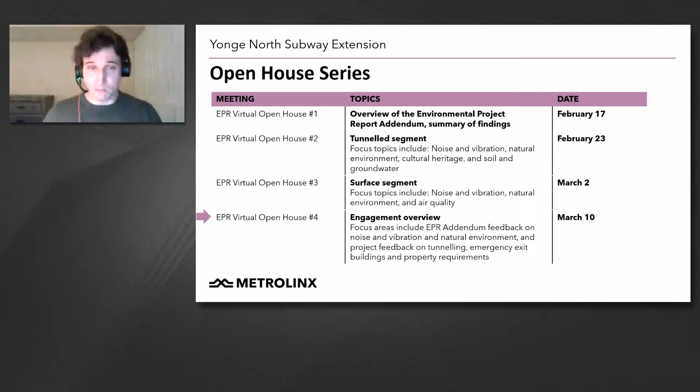All you have to do is click on the Live Events tab on Metrolinx Engage and mouse over the Past Events button. Tonight's open house will be all about revisiting the most popular topics we've been asked about so far and sharing what we've heard from you as we've reached out for input on the study. Remember, you have until next Monday, March 14th, to submit your comments to have them included in the final environmental assessment report.

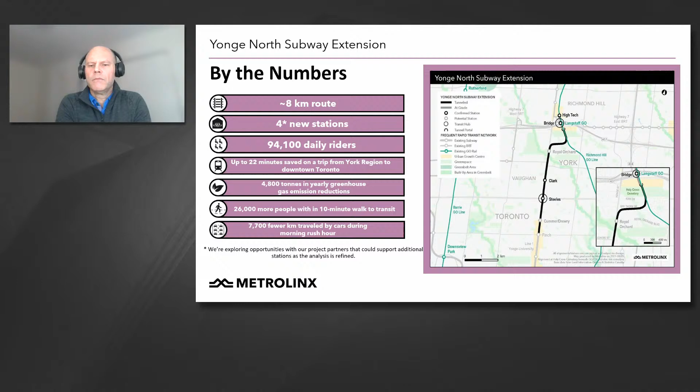First, I wanted to give a quick recap of what the environmental assessment process is and an overview of the environmental assessment process for the Yonge North Subway Extension project. So environmental assessment is a process to identify potential environmental effects of a proposed project. It is completed ahead of construction to identify potential effects on the environment in ways they can be addressed during construction and operation. This work is documented in an environmental project report or environmental project report addendum.

The Yonge North Subway Extension Environmental Project Report was released in 2009, and that report assessed the project alignment that extended from Finch Station to Richmond Hill Centre underground along the Yonge Street corridor. That report was followed by an addendum in 2014, which looked at the train storage facility for the project. And since those two reports, the 2009 and 2014 one, a number of project design changes have been proposed, which are all assessed in our current 2022 addendum report.

At a very high level, these are the surface segment of the project and changes to stations, bus facilities, emergency exit buildings, and the train storage facility. We've covered the changes in more detail as part of the very first open house that we held on February 17th. And of course, you can find a lot more information about this in the addendum report itself, which is available on the website.

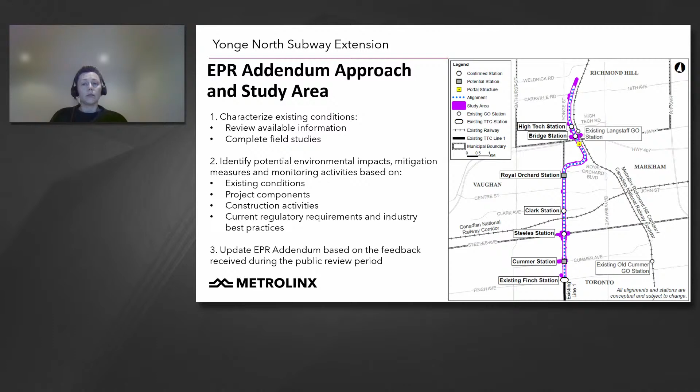The last major step in the addendum development is seeking and responding to your feedback in the forthcoming updates that we will be making to the report. We've notified local communities along the alignment, community groups, municipalities, review agencies, and Indigenous nations of the addendum publication. In the next slide, we will cover how and when the feedback can be submitted and the next step in the addendum process.

So here we go, the addendum review process. The addendum was published on February 10th, and we're nearing the end of the public review period. Public review period closes on March 14th, which is the upcoming Monday, so that would be the last day.

You can submit comments, and then we will take all your comments and feedback and make refinements and updates to the addendum report and publish what we call the updated addendum on April 16th or earlier. Those who were notified of the February 10th publication of the addendum will be notified of the updated addendum publication.

Updated addendum publication kicks off the Ministry of the Environment, Conservation and Parks Minister's review period, which may take up to 35 days. Comments can be submitted to the project email directly, and we also have online feedback forms available on the Metrolinx Engage website.

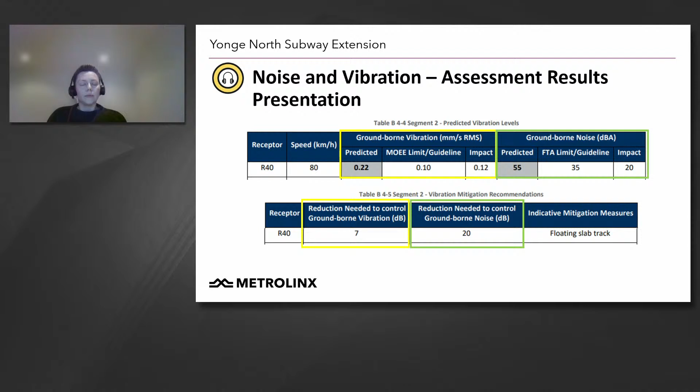Now let's take a look at the vibration levels from tunneling activities. Tunneling activities with most potential for vibration are tunnel boring machines digging the tunnels and temporary service trains transporting excavated soil back to the launch site. Vibration levels generated by the tunnel boring machines are predicted to be below limits for building damage, including heritage structures, some of which are more susceptible to damage than more modern structures. This is because tunnel boring machines slowly auger through the soil and do not need to use vibratory or impact forces to break up the soil.

Tunnel boring machines will be operated continuously and will travel about 10 to 15 meters a day, which means that the tunnel boring machines will pass most single-family residential lots in a matter of a day or two.

Tunnel boring machines will leave soil behind, which will need to be removed from the tunnels. One of the ways this removal can be done is by using temporary service locomotives running along temporary rail tracks, with train cars loaded with materials produced by tunneling. These materials are transported back to the launch site and then off-site for disposal. Temporary locomotives traveling along temporary tracks inside the tunnels have the potential to generate noise and vibration, and we looked at this in our report as part of the construction impact assessment. With the use of mitigation measures such as resilient fasteners for temporary tracks, or rubber-tired vehicles, noise and vibration levels from soil removal activities will be controlled.

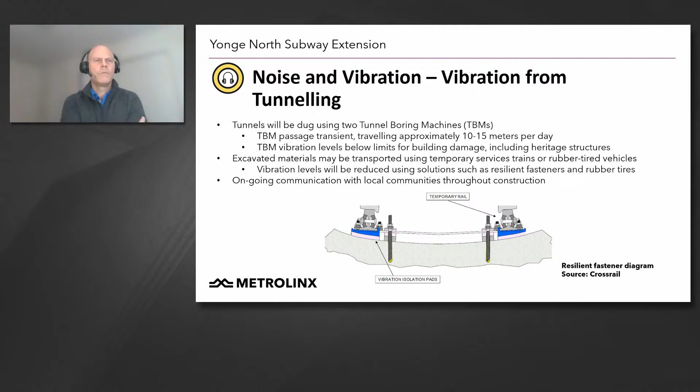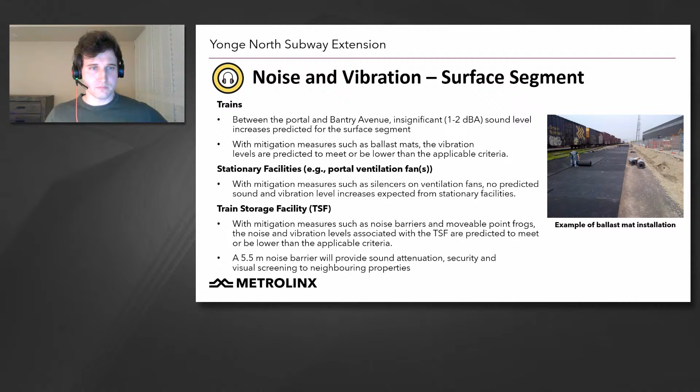I'm just looking at the live feed, Maria. It doesn't seem to be changing. Do you have access to the... Oh, I see it now. It's up? Okay, great. Yeah, there was a bit of a lag.

All right, on to our third topic under noise and vibration, which is surface segment potential noise impacts. I want to start off with train operations along the surface segment. Revenue train operations for the surface segment are between the tunnel portal and High Tech station. Beyond High Tech station, trains slowly travel to the train storage facility, which is also assessed in our report.

Between the tunnel portal and High Tech station, our study predicts a 1 to 2 decibel increase, with one of the assessed locations showing no changes. We covered this in detail at last week's virtual open house, on March 2nd.

I want to stress that the assessment was comprehensive, and this value of 1 to 2 decibels increase reflects all sound sources, including the heavy rail train operations along the existing CN tracks, whereas electric subway trains alone are substantially quieter than those freight trains and quieter than the overall existing sound levels without the subway. This means that subway operations do not significantly alter the sound levels along the corridor.

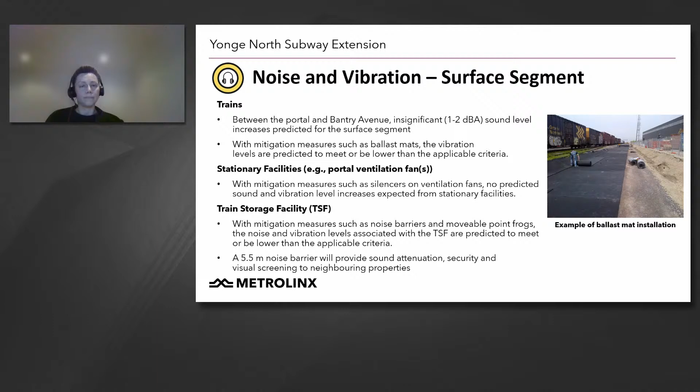That's great, thank you very much, Maria. Good evening everyone. Right now I'd just like to spend a few moments talking about vegetation removals, as Maria introduced.

Right at the outset, I will say that Metrolinx and the project team are committed to protecting as many trees as possible while building the Yonge North Subway extension. Vegetation removals will be reduced to the greatest extent possible, and limited only to the construction footprint.

For any trees that must be removed, we will work with municipalities and groups like the Toronto and Region Conservation Authority to provide compensation in accordance with Metrolinx's vegetation guideline. The vegetation guideline takes a landscape science-based approach to vegetation compensation that meets and exceeds the requirements of applicable local bylaws.

The Metrolinx vegetation guideline also ensures that many more trees are planted than are removed as part of Metrolinx's work. Any vegetated areas that are temporarily disturbed as part of construction will be restored and revegetated to ensure there is no significant disruption or aesthetic issues during the construction period.

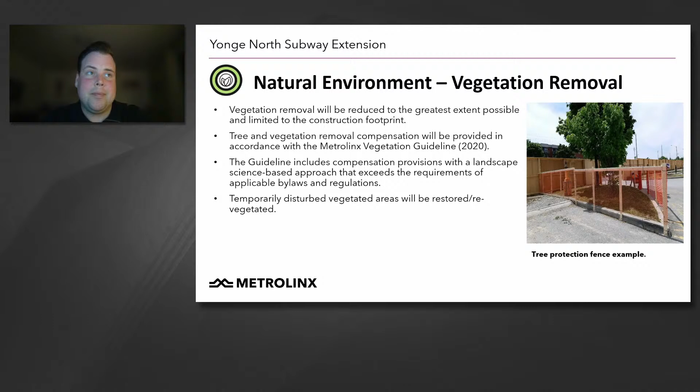I would now like to spend a few moments talking about some of the species at risk findings determined through the environmental project report. Specifically, we performed a review of existing information, informed by groups such as the Toronto and Region Conservation Authority, Fisheries and Oceans Canada, and others that had identified sources of potential habitat for protected species such as barn swallows and bats.

We found the potential for this habitat along the alignment, which may be impacted as a result of construction at the surface. Although we're not anticipating impacts to species at risk or their habitat due to the current construction footprint, Metrolinx will be completing additional targeted studies closer to the date of construction to verify our findings.

We are not anticipating impacts to protected aquatic species such as red-side dace, and in cases where in-water work is proposed, such as the German Mills Creek work discussed during our last public meeting, the portion of the watercourse where work will occur has been screened for species at risk potential. Construction of the YNSE will meet all regulatory requirements for environmental protection, including those under the Endangered Species Act.

Sorry, can everyone hear me? Yep, we can hear you, Charlie. Yep, all good. Thank you.

So tunnel dimensions and depths in Royal Orchard: the tunnels are approximately 6 kilometers of twin tunnels. We will be extending from the existing Finch Station to the tunnel portal just south of Langstaff Road East, which is just south of the 407. Currently the tunnels will be 5.6 meters in diameter, and being twin tunnels, they are approximately 5.6 meters apart.

The tunnel will be 17 meters deep below Pomona Creek and roughly 21 to 26 meters deep below Royal Orchard Park. You see the diagram below - how the tunnel portal comes down from the portal below Pomona Creek and Pomona Park, going to the potential Royal Orchard Station and underneath the East Don River culvert in that Royal Orchard area.

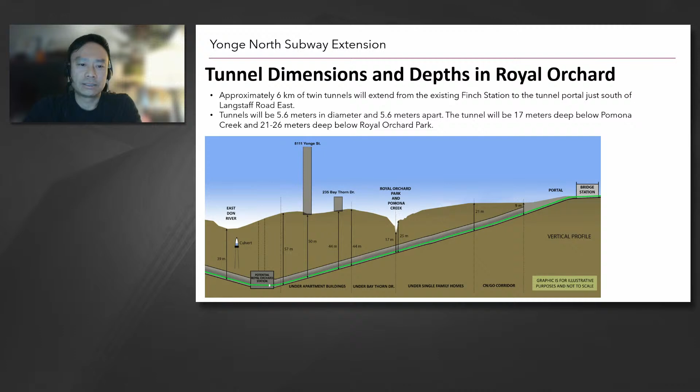Emergency exit buildings will need to be at various points along the tunnel section of the route and are only used in the unlikely event of an emergency in the tunnel that would require people to safely evacuate or get out to the surface.

They're spaced along the route of the tunnel and only on the underground portions. We are working to determine the exact location of the emergency exit buildings needed along the entire underground portion of the subway route for this extension, with a specific focus to reduce the number needed in residential areas.

And I'll pass it over to Maria. I think the next slide is the property. Thank you, Charlie. Thank you, Charlie.

So recently, people would have been receiving notifications about the EPR addendum if their properties fell within the study area. In addition, Metrolinx Property Acquisitions has sent letters to several landowners for properties that are within the areas where the YNSE project will require property acquisitions.

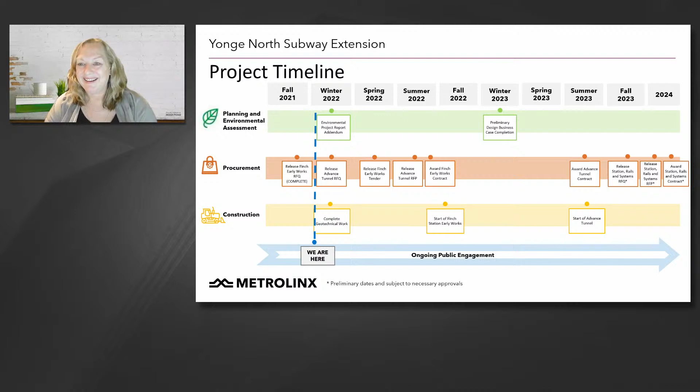Thank you. Okay, so we've landed here on the project timeline, and we usually talk about this at the beginning of our presentation, but today we're going to end on it because we want to talk about where we're going next. You can see that we're on the eve of some pretty significant milestones that will move us from the planning phase into the procurement and construction phase.

So we're talking today about the environmental project report addendum, and you've heard where we are in that process. Up shortly will be the release of our advance tunnel request for qualifications, the first step on a journey to get us to tunnel construction late in summer 2023.

We're also completing the geotechnical investigations. That is some critical information that we need for design and construction for the project, and we'll be finishing that up in the next couple of months.

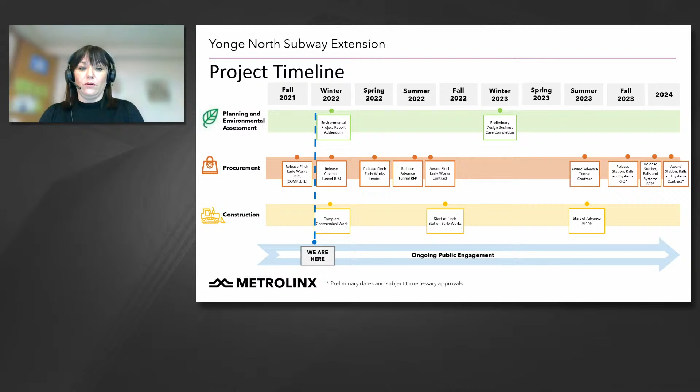What's important here for me is this blue line at the bottom, this ongoing public engagement that has begun way back at the release of the IBC, has continued and will continue all the way through this project. You're going to hear us say we're not going anywhere. We're going to be here with the community, having these ongoing conversations, sharing information, listening to the community all the way through to opening day.

Next slide, please. So we're just looking at some of the upcoming engagement opportunities.

The public review period for the EPR addendum closes March 14th, as James was referencing right at the beginning. We're going to have a series of virtual open houses on each of our milestones. Finch Early Works is one of the ones that you'll hear about very soon.

But until then, we'll be having pop-ups at community centers, libraries, transit hubs. You may have already seen us around the community dropping flyers, postcards, promoting these events, promoting where we are and how you can get in touch with us.

You've heard a lot about our upcoming community office. That'll be near the northern end of the extension. We'll be staffed by the community engagement team, which you'll be very familiar with by the time we're there in the office itself. And that's where we'll be all the time to answer your questions and be available to you.

We're also going to be exploring some upcoming noise and vibration mitigation experiential opportunities, and those will be available at the community office. So more to come on that as well.